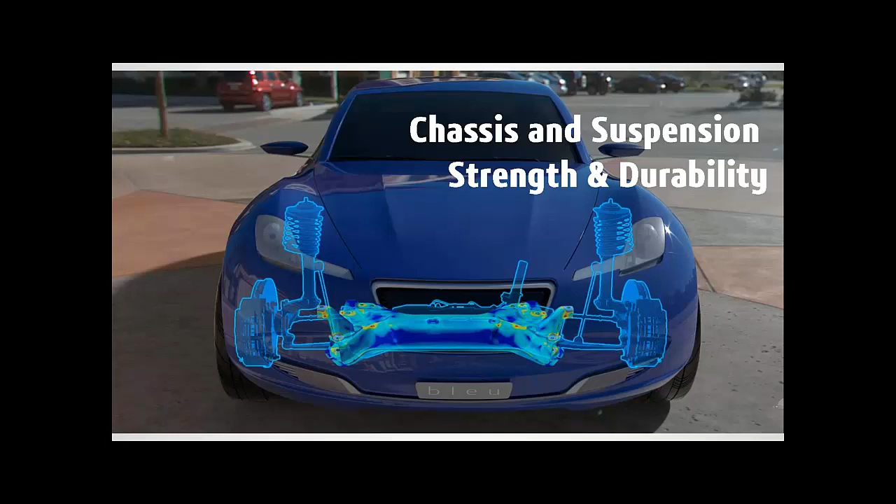When you consider the current industry trend, you can easily find the following four business drivers: electric, connected, and autonomous vehicles; new customer experience; quality, cost, and regulations; and mass production to mass customization. All of these business drivers are related to chassis and suspension.

The new electric vehicle requires a new process of vehicle design. Due to the simple configuration of the powertrain, the development time of the vehicle is shorter, and one platform for variation of vehicles is demanded more and more.

Ride or handling, ride and handling of the customer experience cannot be satisfied at the same time. Trade-off is necessary, and the high expectations in the new electric vehicle is also challenging.

Like other vehicle systems, chassis and suspension contribute to the ever-growing challenge to meet quality and regulatory requirements while reducing cost.

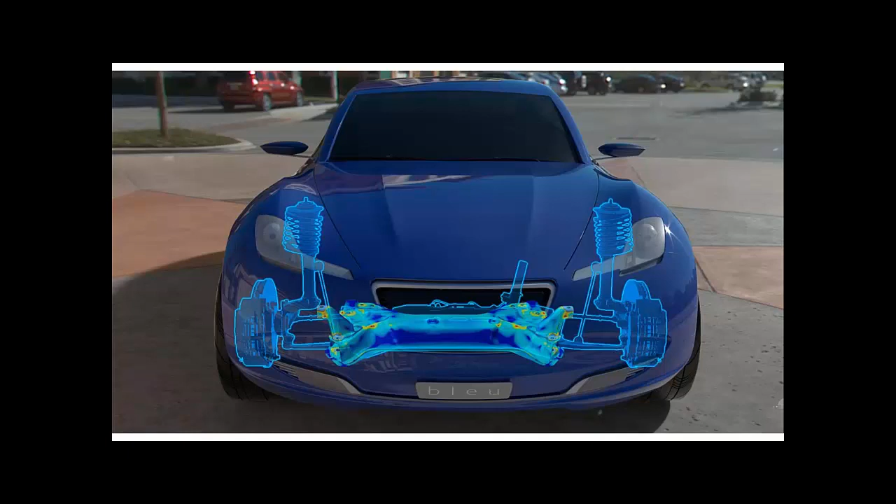In order to meet all the structural requirements related to the challenges I mentioned before, DS provides the chassis and suspension strength and durability industry process. Here's the expected outcome and benefit of using this chassis and suspension strength and durability industry process.

First, let me summarize the engineering targets we mentioned so far: managing multiplying variants, increasing engineering process efficiency, reducing vehicle weight through component lightweighting, reducing unsprung mass through lightweighting, ensuring vehicle safe operations during abuse events, validating structural integrity of the suspension system and components, and correlating simulation and test results.

Once these targets are met, the following outcomes and benefits can be achieved. First, faster time to market. Second, reduced component and vehicle weight. And finally, limited failures, recalls, and warranty cost.

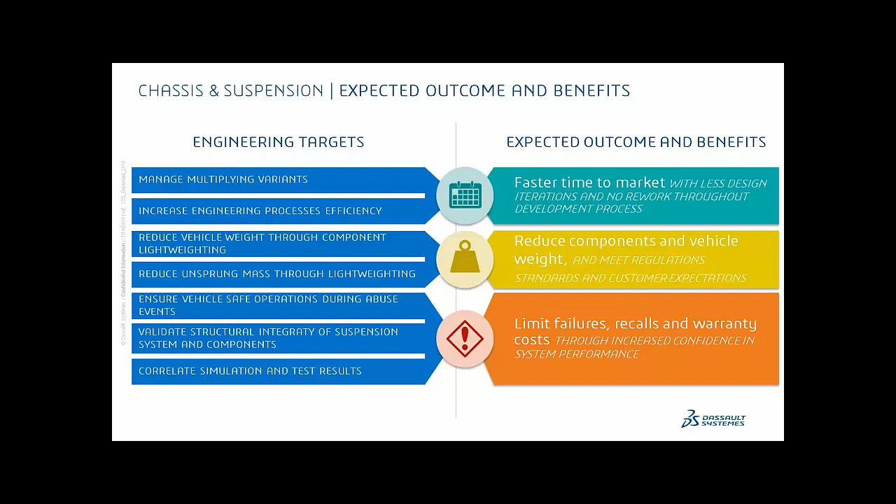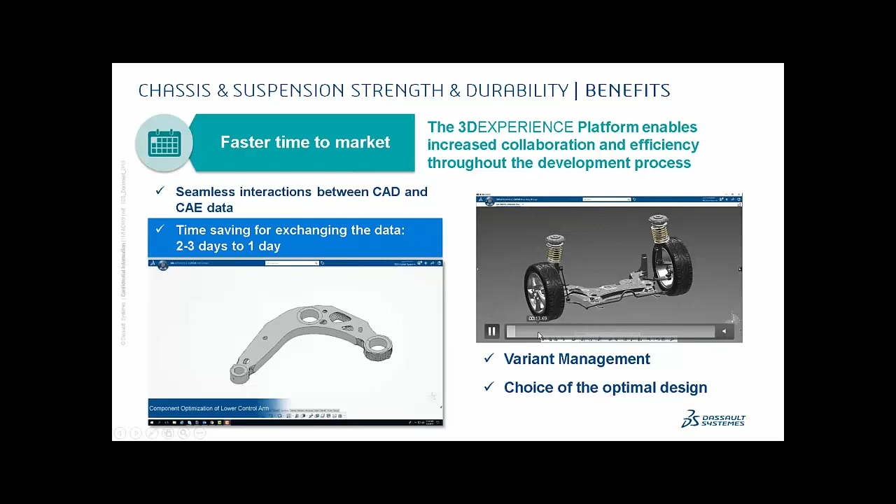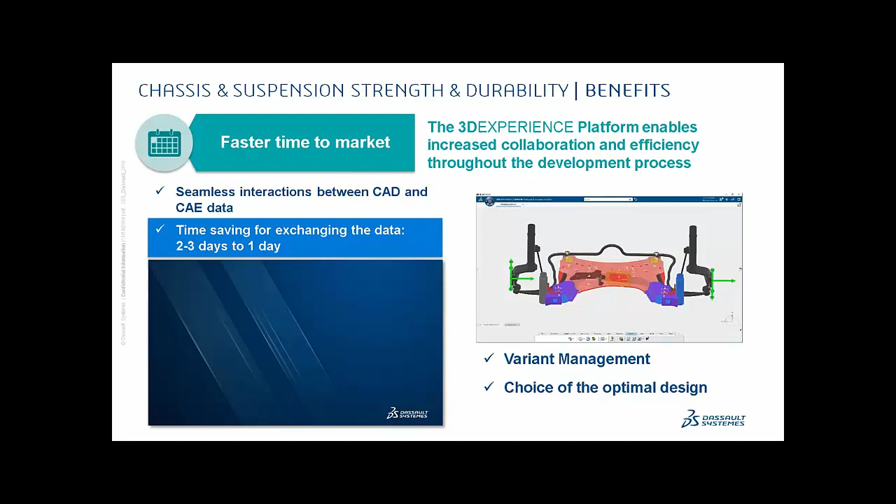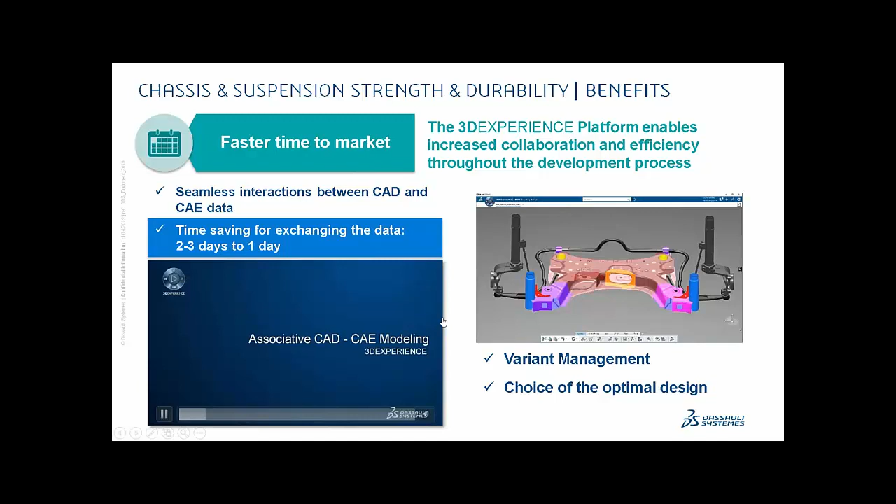For faster time to market, the 3D Experience platform enables increased collaboration efficiency throughout the development process. As you can see, it provides seamless interaction between CAD and CAE data, and this can provide saving in time for exchanging data, for example, 2-3 days down to 1 day.

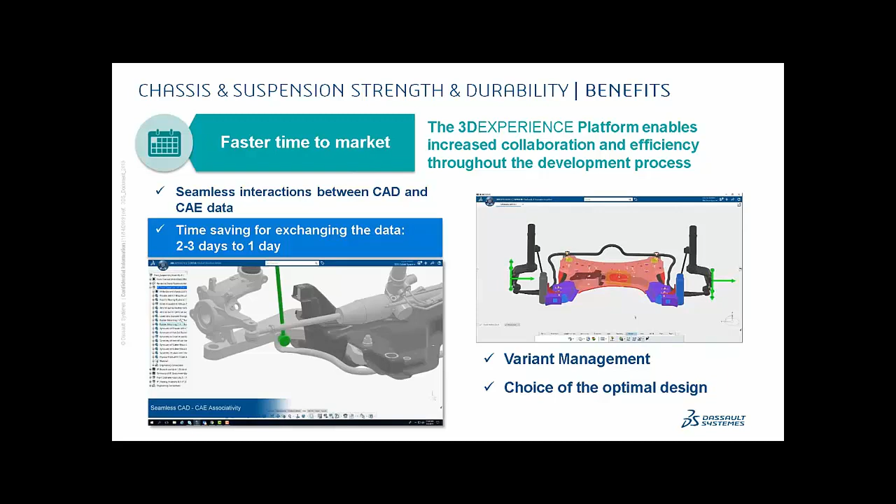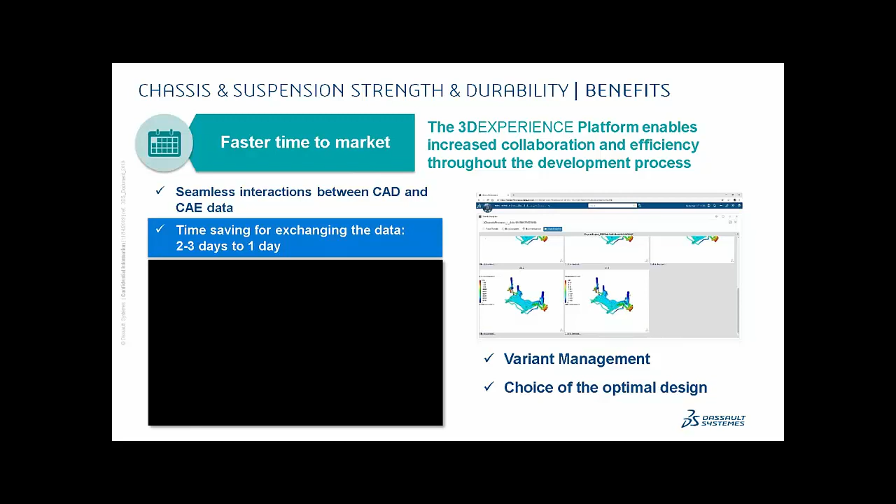It also provides great functionality to select various results across the various parameters of the design and choose the optimal design. Another great functionality in 3D Experience is that it enables digital continuity by carrying information through each step of the development process, from concept design to final validation.

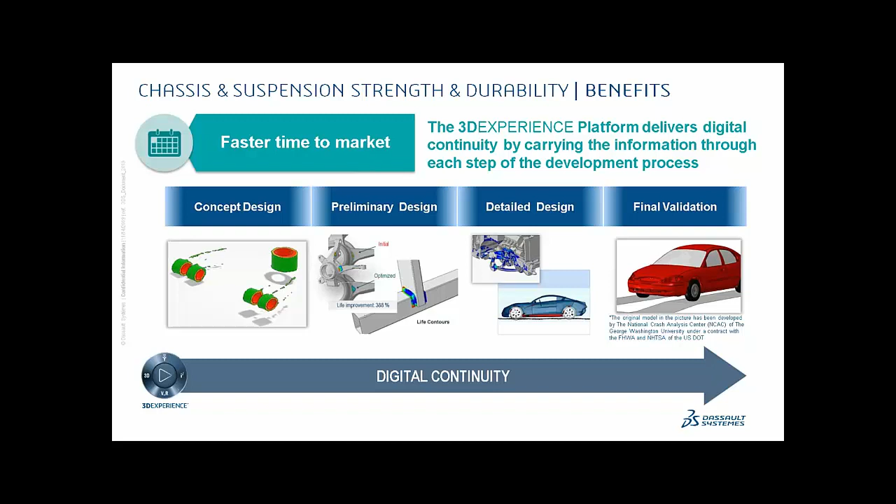SIMULIA also provides advanced tools to help engineers deliver optimum designs fast while retaining confidence in their performance. By topology or parametric optimization, engineers can easily decide which topology or parameters are best for the components in the system.

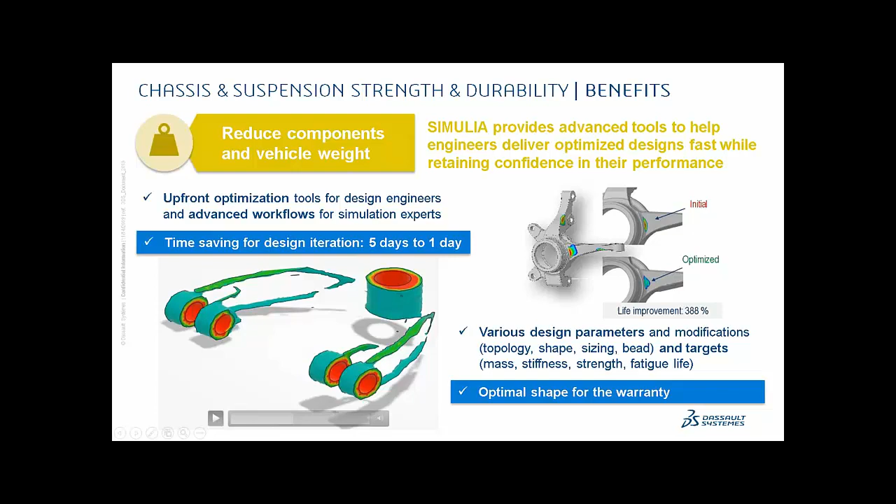It also considers large articulation and deformation. The fatigue life tool can predict spot and seam weld fatigue, and it is validated with more than 3,500 physical fatigue test results.

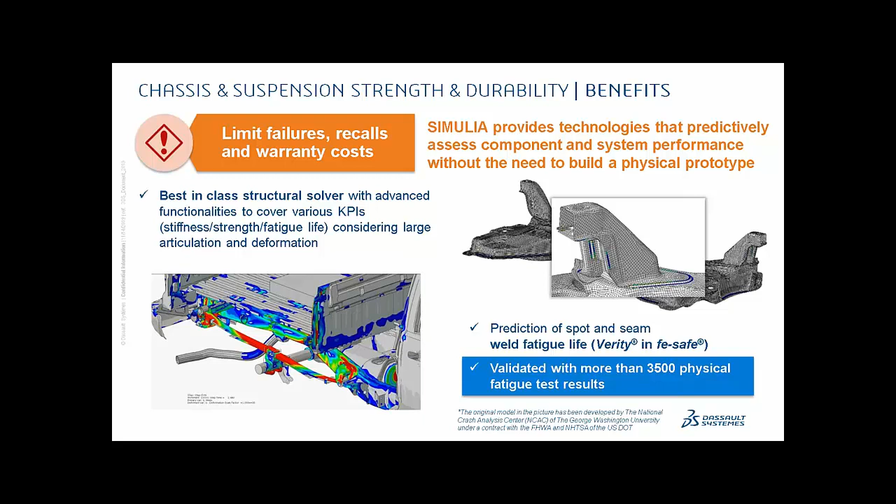The best-in-class structural solver with advanced functionalities can also simulate both components and the full system of the suspension accurately to predict real load cases. This enables cost savings for physical testing.

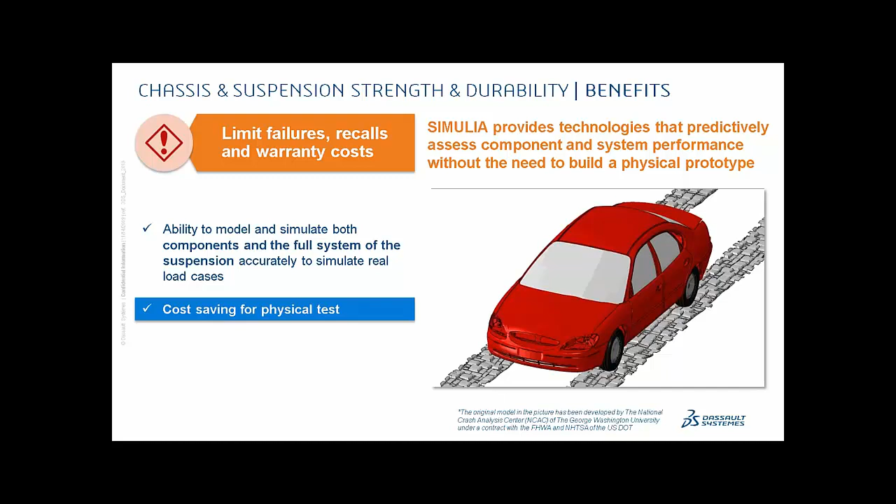In this industry process, the user can achieve various KPIs. The 3 business KPIs you can see on the top right—detect issues at an early stage, reduce cost, and reduce warranty costs—can be easily achieved by acquiring the several performance KPIs you can see on the left.

These include improved ride and handling by engineering suspension components with the desired stiffness and strength; designing subsystems to satisfy required stiffness, strength, and fatigue life; controlling permanent deformation after abuse load cases; and decreasing weight through multi-objective optimization, with more alternatives evaluated through design-driven automated simulation models.

The performance KPIs I mentioned will be achieved when the individual technical KPIs, shown on the bottom right, are met: efficiently predicting large articulation deformation, accurately modeling the full suspension for predicting durability, reliably predicting failure in abuse cases, and evaluating the trade-off between performance and weight.

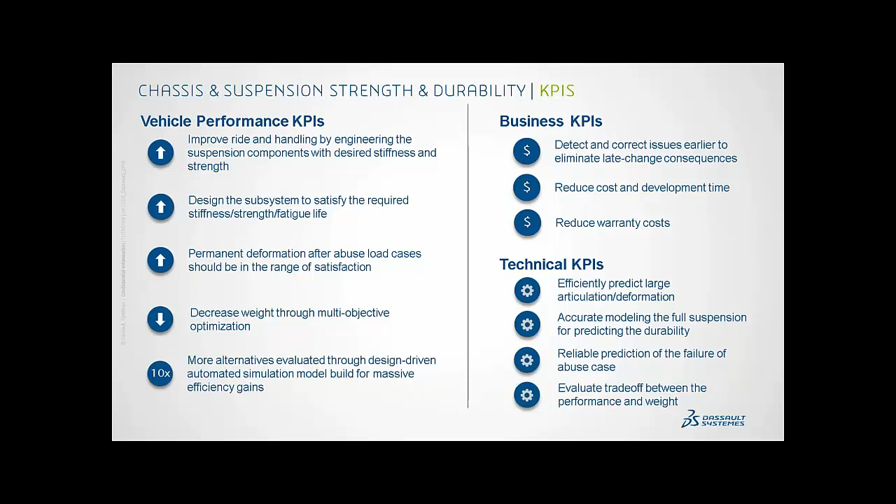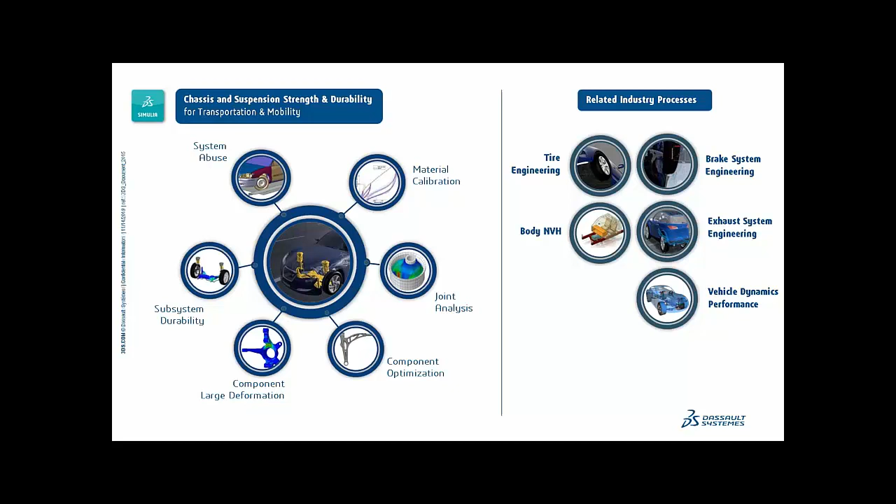As Young-Won explained so far, in order to meet the customer's needs on chassis and suspension strength and durability for transportation and mobility, SIMULIA developed 6 main workflows around chassis and suspension of a vehicle, as shown in this slide. SIMULIA also developed or is developing other workflows such as tire engineering, brake system engineering, body NVH, exhaust system engineering, and vehicle dynamic performance. I will not touch in detail on those related industry processes, but I will focus on the 6 workflows developed for chassis and suspension strength and durability for transportation and mobility.

Next slide, please. To recap what Young-Won explained so far, I want to talk about the overview of chassis and suspension strength and durability workflows with respect to the design stages and their interactions with other workflows we developed or are developing. During the concept selection and preliminary design stages, customers can adopt the material calibration workflow to build a material database. It can be applied to a new material and also to improve the calibration accuracy of old materials. Results of material calibrations can be used by component optimization and component large deformation workflows, and also in the joint analysis workflow during preliminary and detailed design stages.

Then all of the results of component optimization, component large deformation, and joint analysis workflows can be transferred to the subsystem durability workflow to assess subsystem durability and optimize it. All of the component optimization, component large deformation, joint analysis, and subsystem durability workflow outcomes can be used by other IPE workflows such as vehicle dynamics, brake system engineering, exhaust system engineering, and vehicle NVH and acoustics performance workflows.

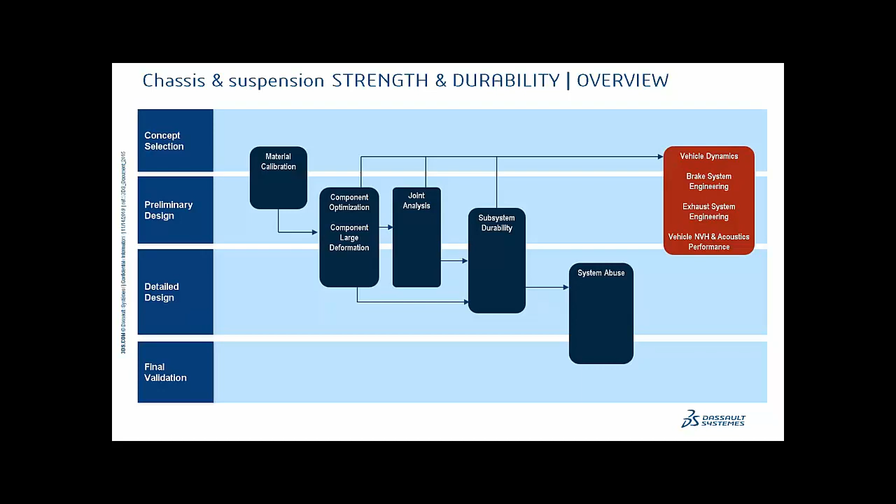MCA has a very convenient tool for collecting and reading material test data, and also a very nice tool to manipulate the test data, such as shifting, filtering, and decimating the raw data. Doing this raw test data manipulation will help speed up the calibration procedure. MCA has two modes of material model optimization: functional and numeric. In functional mode, MCA implemented a closed-form relation between the measured test data and the stress calculated by the material models, so evaluation of response and optimization is very fast. Numeric mode uses the built-in Abaqus backbone to assess the material response, so optimization takes longer, but eventually both modes do the same thing.

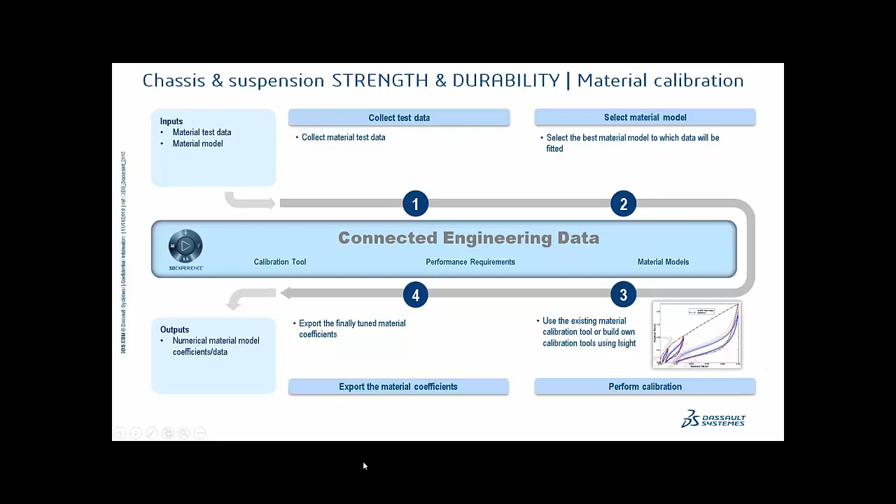The second workflow developed was the joint analysis workflow. We used a parameterized suspension bushing for this workflow. Inputs to this workflow are the initial bushing design, which is parameterized, target stiffness or compliance, and target fatigue life. Through this workflow, the user can achieve optimized bushing geometry which meets the target stiffness and fatigue life with the least

material of rubber. The first step is creating parameterized bushing geometry using Abaqus CAE, then optimizing bushing geometry parameters using Isight with multiple objectives, such as compliances in the major directions of the bushing and the least mass of the bushing. Once the Isight optimization is completed, you can perform Tosca shape optimization to achieve the target fatigue life with the least mass, with combined usage of Abaqus and fe-safe/Rubber.

These two separate workflows for joint analysis can be combined into one, or the user can perform trade-off analysis to fill the gap of degraded stiffness during the shape optimization for fatigue life. In any case, the user can obtain optimized geometry of a bushing component for stiffness and fatigue life using this workflow, and those optimized bushings can also be used in the follow-on subsystem durability workflow.

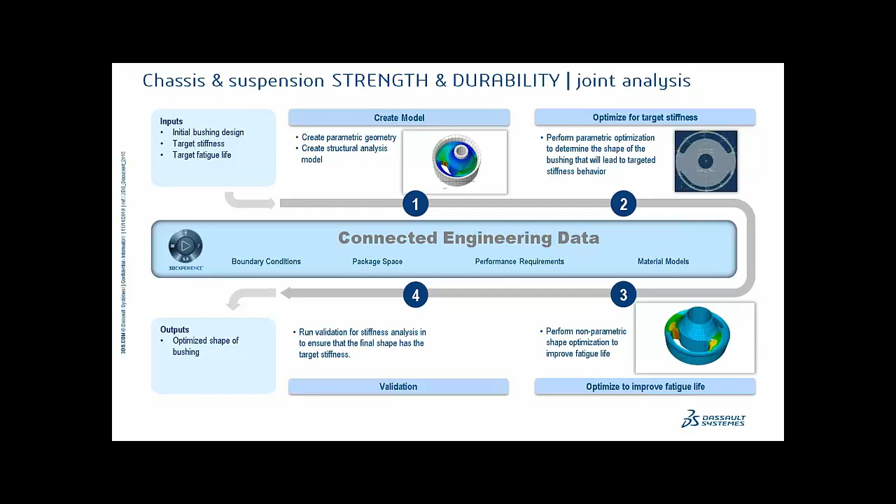Now I want to talk about the component optimization workflow we developed for chassis and suspension in IPE. Here we targeted optimizing the lower control arm, but the same concept can be applied to other suspension components like a knuckle or any other components. From kinematics and compliance analysis using MBD software such as SIMPACK, we can get the optimized hard points of the suspension system. And we have assigned the design space for each suspension component. With this information, we can create an initial model as shown in step 1.

And then we perform topology optimization with respect to typical load cases using Tosca or the Abaqus optimization module. We can do the topology optimization, and then on the 3DEXPERIENCE platform, we have functionality which can reconstruct manufacturable CAD geometry based on this topology optimization geometry.

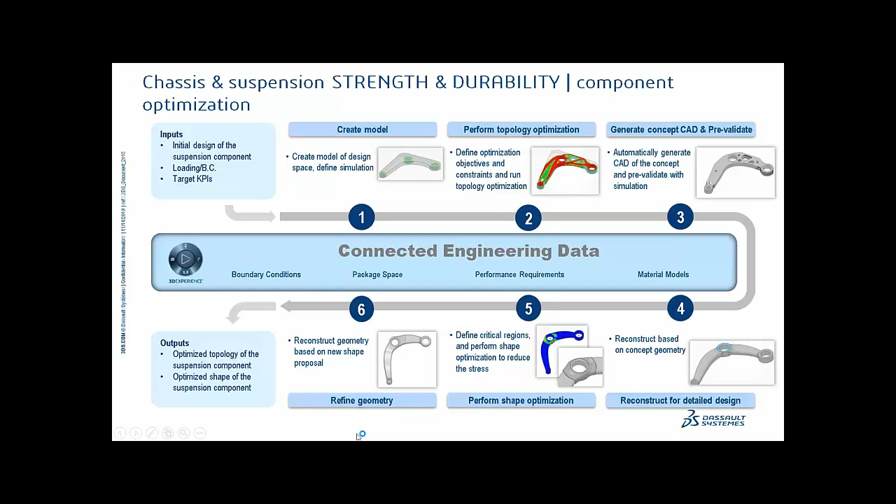Then we can perform additional large deformation analysis for the suspension components. In this workflow, we can investigate the large deformation performance of the lower control arm. From the previous workflow, which is component optimization, we have optimized geometry of the lower control arm with respect to the operational loading conditions. Additionally, we can perform large deflection analysis on this lower control arm using the so-called Riks method of Abaqus to assess the post-buckling behavior of the component.

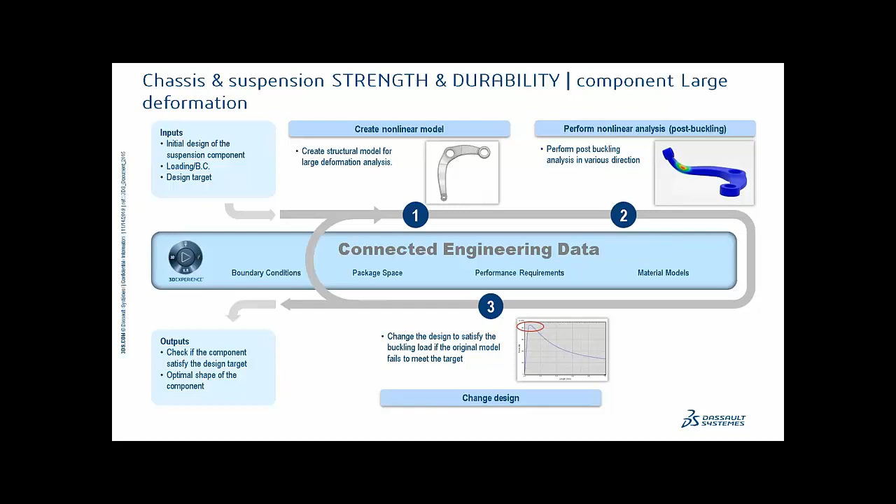By collecting all or some of the previous workflows' results, we can construct, for example, a half or quarter suspension model of a vehicle. In this model, we have now optimized the suspension bushing and lower control arm from the previous workflows. We can use the Abaqus CAE plugin or SIMPACK for this suspension model. Both can include suspension components such as bushing, lower control arm, knuckle, tie rods, etc. as deformable bodies. In SIMPACK, we can include those components as flex bodies using Abaqus substructure generation.